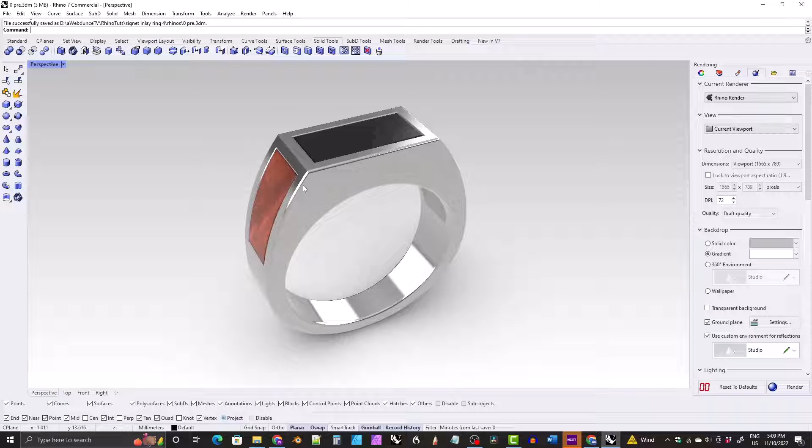I'll show you not only how to make the ring, but also how to make the materials - the silver, the wood, the onyx, and even a kind of rough silver material for the underside of the ring.

We'll start off by creating a new file. I'm going to use the small objects millimeters template.

We'll hop over to the front viewport and lay in the sizing circle. I'm going to make it a US size 10, so I'll give it a diameter of 19.76 millimeters, and set the curve seam to the bottom quad.

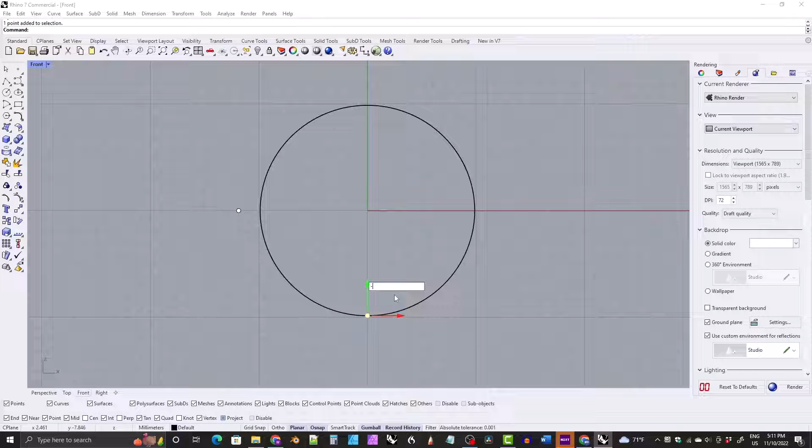Now we'll lay in the bottom arc. I'll snap in a point at the left quad and one at the bottom quad. I'll move the left point out by 2 millimeters, and move the bottom point down - I'll control Z and move it down by 1.7 millimeters.

Now I'm going to lay in an ellipse at the center of the world, snapping first to one point and then to the other. Then I'll mirror this left point over to the other side and split this ellipse by these 2 points, then delete the upper half as well as all of the points.

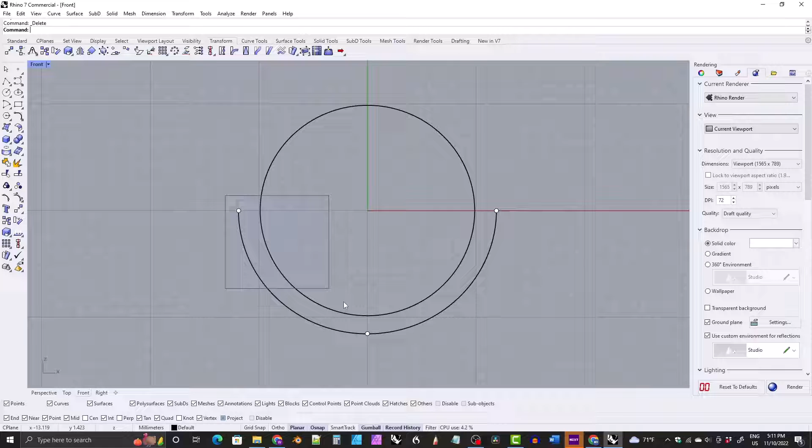Now we want to lay in the top line up here. We'll grab the line tool, snap to the top quad of the sizing circle, and click on both sides up in the command line.

This is going to double the length. I want this line to be 14 millimeters long, but because we've got both sides activated, I'm going to type the number 7 and hit enter. So this is giving us a 14 millimeter line.

I want this to be perfectly horizontal. To do that, I'll hold down Shift, pull out to the side and click. And now we'll raise this line up 4 millimeters.

Now we want to connect the bottom arc to this line up here, and we'll use Extend Curve to do that. Click on Extend Curve, then up in the command line click on Type and set it equal to Arc, then click on the left side of the bottom arc.

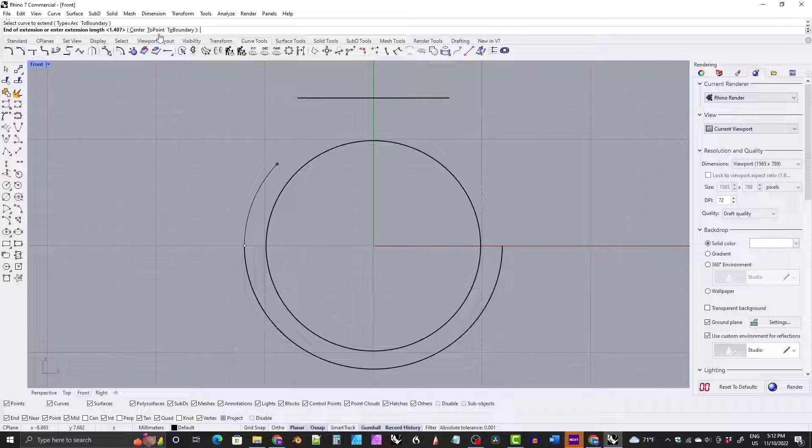You can see the line is extending, but you can't really control where it goes. So up in the command line, click on ToPoint and snap to the left side of that upper line. The command is still running, so click on the right side of the bottom arc, then snap to the right side of the line and click. You'll have to press enter to exit that command.

Then select the bottom and the upper line there, join them together, and move the curve seam down to the bottom.

All right, now we are ready to lay in the side curves. We'll go over to the right viewport and lay in a line at the top - snap to the top and click on both sides again.

I want an 8 millimeter line up here, so I'm going to type the number 4 and hit enter. I want it to be horizontal, so I'll hold down Shift, pull out to the side and click.

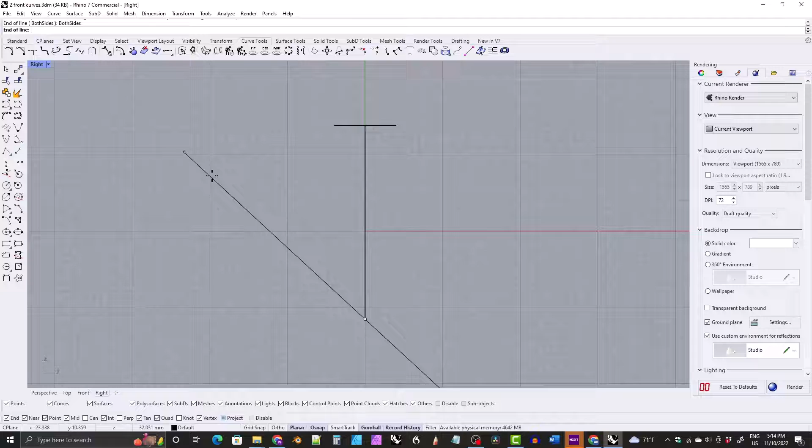We'll do the same thing to the bottom, except the line will only be 4 millimeters long. So we'll get the line tool, snap to the bottom, click on both sides, type the number 2, hit enter, hold down Shift, pull out to the side and click.

Now we're going to use the arc tool. You don't always have to use the arc tool - you can put a variety of shapes between these two lines, but for this project we're going to use it. There's the arc drop down, but we're going to click on this particular arc tool right here, under curve tools. If you can't find it there, you can get it from the arc drop down - it's the third option in.

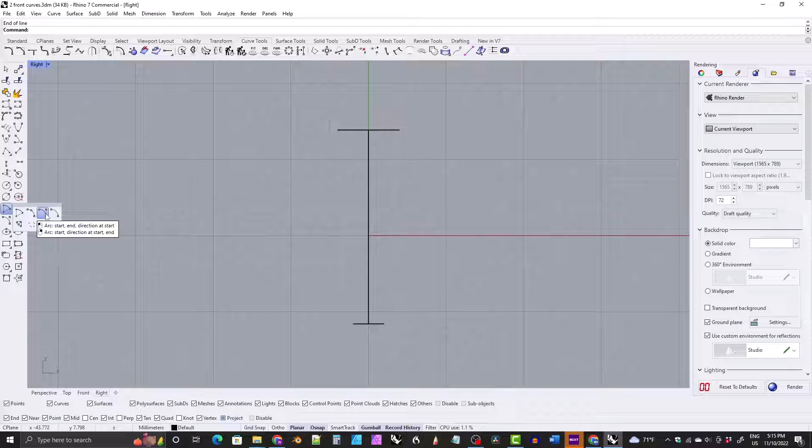This particular arc tool lets us select a start point, an end point, and a direction. The direction we want to choose is straight down. To do that, hold down Shift and pull down and click, and this will make that gentle arc for you there. Then we want to extend it a little bit above the top and a little bit below the bottom.

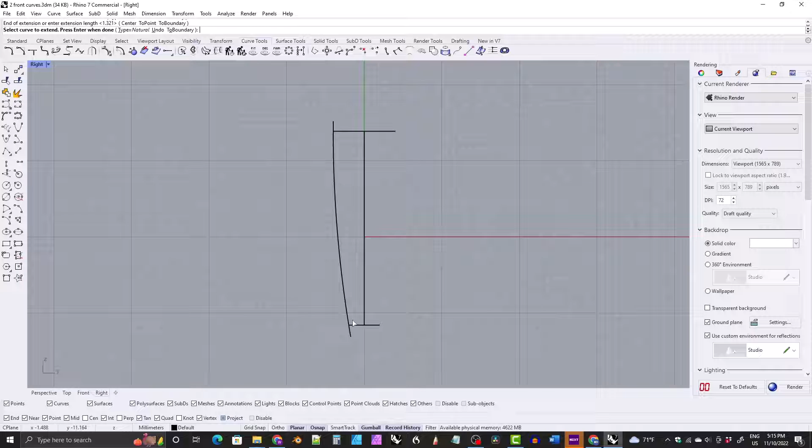So we'll click on Extend Curve, click on the top and pull up a little bit, click on the bottom and pull down a little bit. Hit enter.

Then we'll mirror this line across to the other side. Now we'll join these two lines together with straight lines, getting the line tool again and connecting the two tops and then the two bottoms. Then we'll join all of these lines together to make a closed shape, and delete these guidelines that we made earlier.

So now we've got our front curves and our side curves done, and we're ready to create the base shape. We'll just select the two front curves and extrude them out. I'm going to switch to shaded mode so it'll be easier to look at, and then we'll click on the side curves and extrude them out.

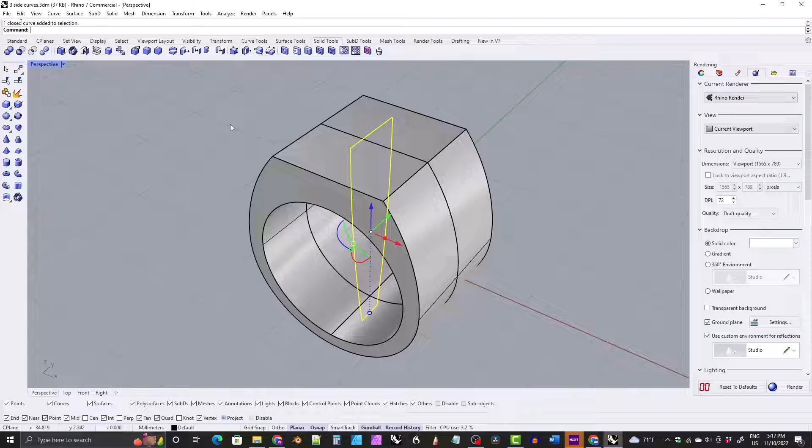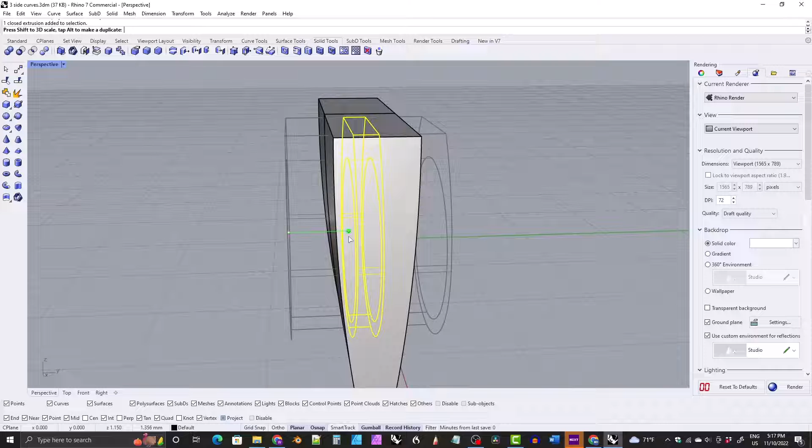You want to make sure that the two shapes extend past each other. For instance, you don't want this shape to come within this shape here like that. You want it to extend past the front shape, and you want the front shape to extend past the side shape. You don't want something like that - you want the shapes to extend past each other.

Now we're going to run the Boolean intersection command. Click on one of the shapes, it doesn't matter which one. Click on Boolean intersection, click on the other shape and hit enter. And that is our base shape.

Now we're ready to hollow out the ring. We're going to have to create a lot like creating the ring - a set of front curves and then a set of side curves to create a shape that will hollow out the ring. So let's jump over to the front view.

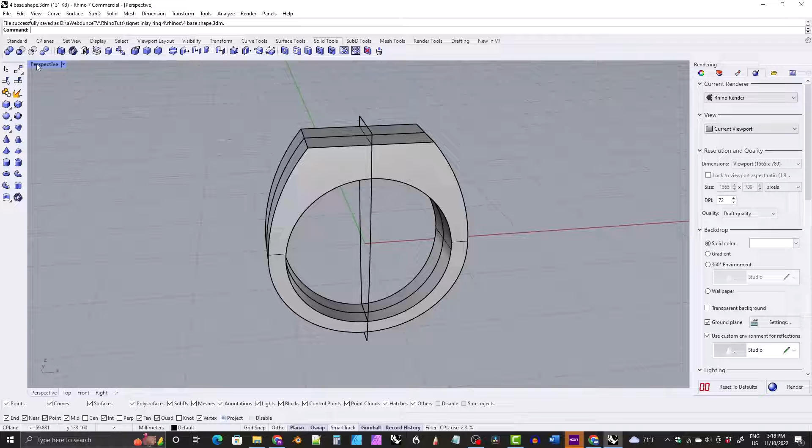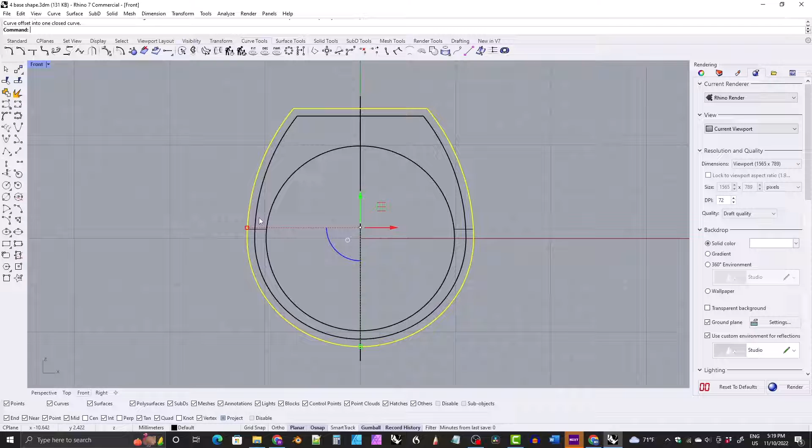It's better to be in shaded mode for this. We're going to click on the outer curve here. Normally, if we didn't have the inlaid gemstones, what I would do is offset that outer curve by maybe 0.8, maybe 1, maybe 0.8 to maybe 1 millimeter, and this shape here would be the beginning of the shape of the hollow from the front view. But because we have those inlaid stones, we can't do that.

Let me see if I can show you why. Let's say that the inlaid gemstones are 0.6 millimeters thick, so we'll offset the outer curve by 0.6 millimeters. Let's pretend that this was a gemstone here. If we were to hollow this ring out by coming in 0.8 millimeters from the outer curve, that would only leave 0.2 of a millimeter of metal behind the gemstones for them to rest on.

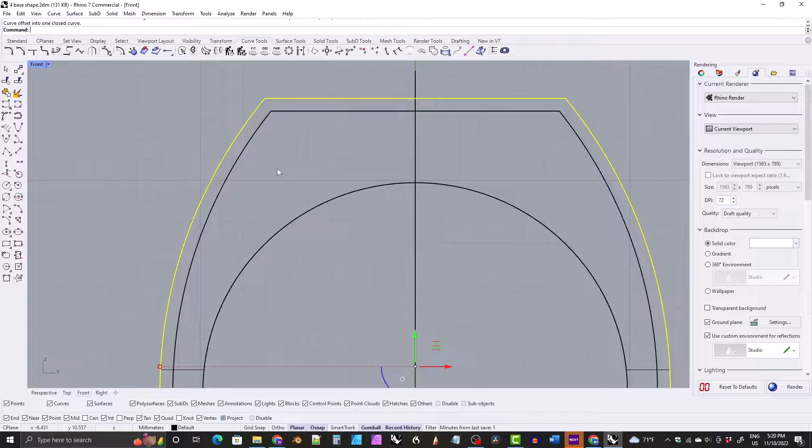And that's just not enough metal. So what we need to do - I'll just delete both of these - is first, again this is just because of the inlaid gemstones, we will select the outer curve and offset by the thickness of the gemstones. We're going to say that they're 0.6 millimeters thick for this project. So this is where our inlaid gemstones will come to.

And now we need to click on that line and offset again by the amount of metal that we would like to have behind our gemstones. I'm going to say 0.8 would be good for that. So we can delete this line now, and this is the starting point of our hollow shape from the front view.

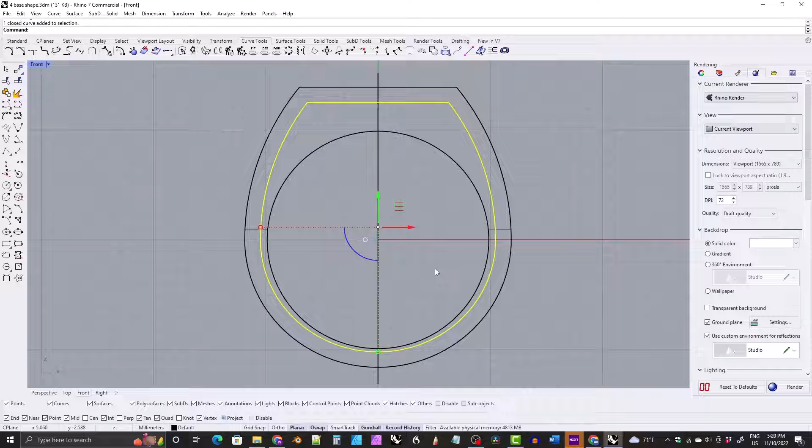Now we're going to cut the bottom off this shape. So lay in a line somewhere around here, probably about 3 or 4 millimeters down from the red axis line, somewhere in this area right here. Then select both of those lines, the shape here and this line that we just made.

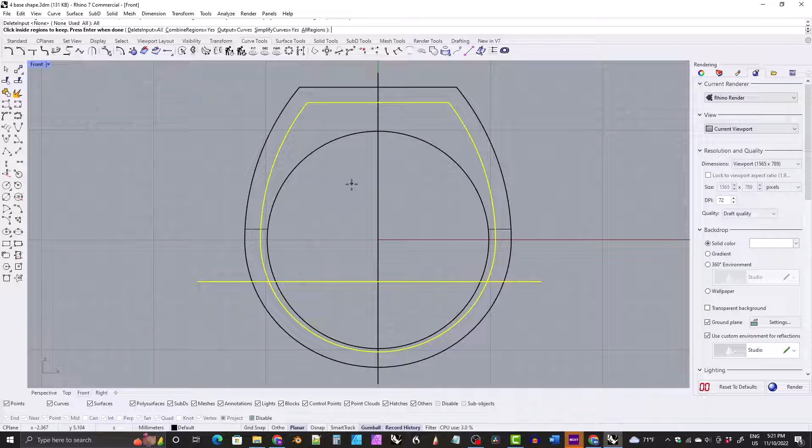Come up to Curve Tools, then Curve Boolean, click on that. Make sure that Delete Input is set to all - if it's set to none, for instance, click on it and set it to all. Then click inside this area here, you'll see it kind of highlight, and then hit Enter. You'll be left over with this shape.

Now, we don't want our hollow to come down and then come out abruptly out of the ring. We want it to exit gently. Whenever possible, it's not always possible, but we would generally like the hollow to come out a little above the halfway point, but that's not a hard and fast rule - that's just, at least where I worked, a general preference whenever possible.

That might not apply to every situation, since I just worked at one jewelry store for 10 years. So that was a general rule of thumb there, though it might not apply everywhere. But in this case, we do want it to exit about 1 millimeter above this line here.

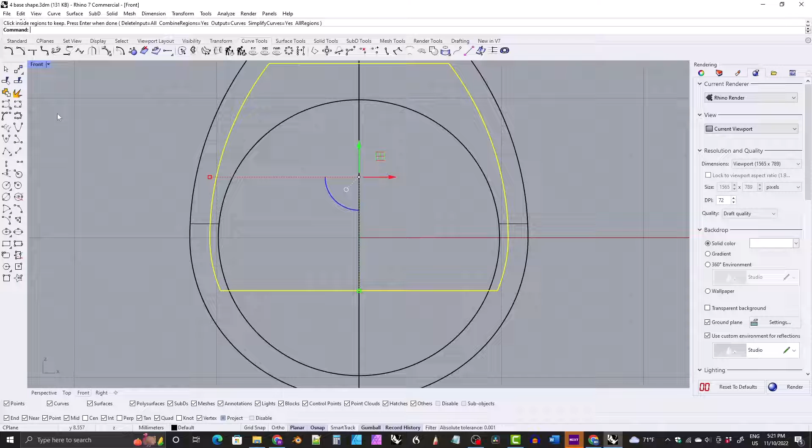So we'll lay in a straight line as a guide going across the center here, and then lift it up about 1 millimeter above—this is where our hollow is going to exit. Our gemstone is going to end about 2 millimeters above that line, so this is going to be about the bottom of our gemstone here.

Okay, so we'll delete that line for the moment, and we're going to select this line—this is just a guide, by the way—and we're going to select this shape here.

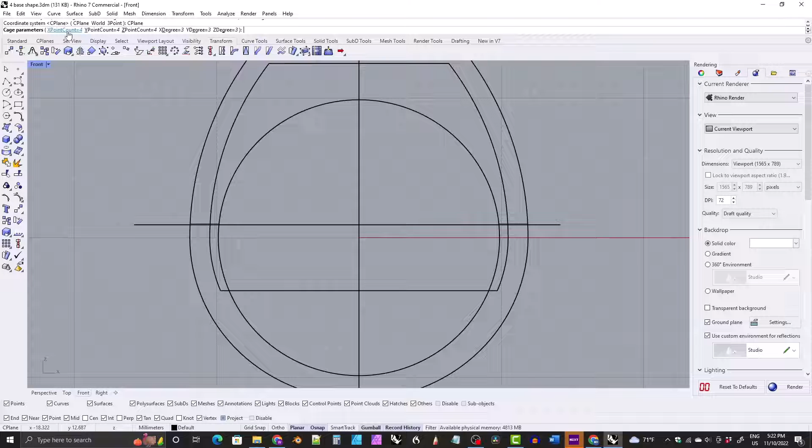We're going to go to Transform and click on the Cage Edit tool, and we're going to click on Bounding Box, C-Plane, and then it should say 444 333 by default. You should be able to just hit Enter through this part, but if it doesn't, double check it says 444 333, then hit Enter once, twice, and you'll get these control points.

Just box select the bottom row of control points and scale them in until your shape intersects over where this line intersects the sizing circle. You don't have to be 100% precise, just close. So that's pretty close right there—this shape is going over where this line intersects the sizing circle.

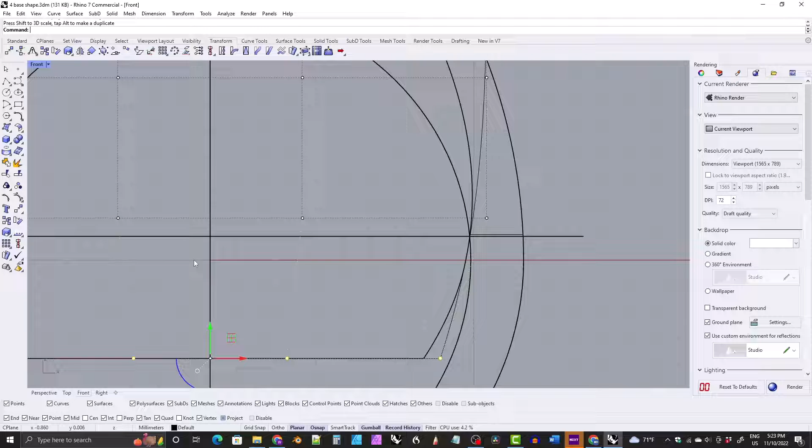So we know that the hollow is exiting the ring at about 1 millimeter above this axis line here. Okay, we're going to delete the cage, and we can delete this guideline here as well.

And now we will create the shape of the hollow from the side view. We'll hop over to the right viewport and select this outer shape here. And again, this is just a design choice, but I'm going to inset or offset that curve by 1.2 millimeters. So now this is the shape of our hollow from the side view.

We'll hop over to the perspective view. Let's turn on—well, we don't even need to do that. So we've got this curve here, that's our side view curve, and this is our front view curve for the hollow. And now we will isolate those.

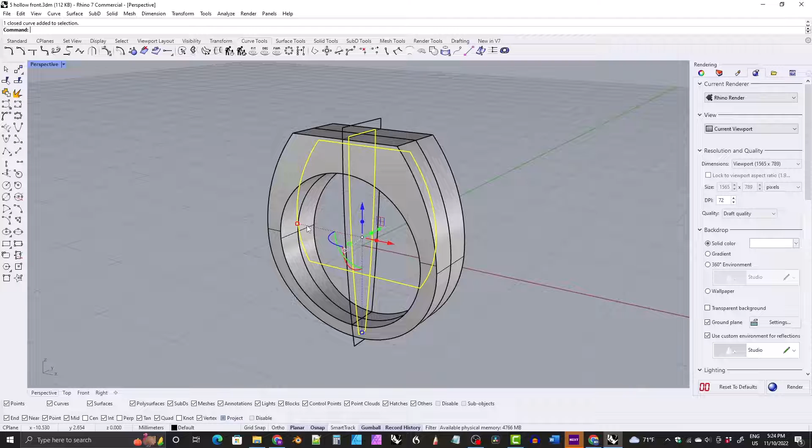And we will extrude the front view curve, and we'll extrude the side view curve and take the intersection of those two shapes, just like we did with the ring. And now we'll type show and bring back the ring.

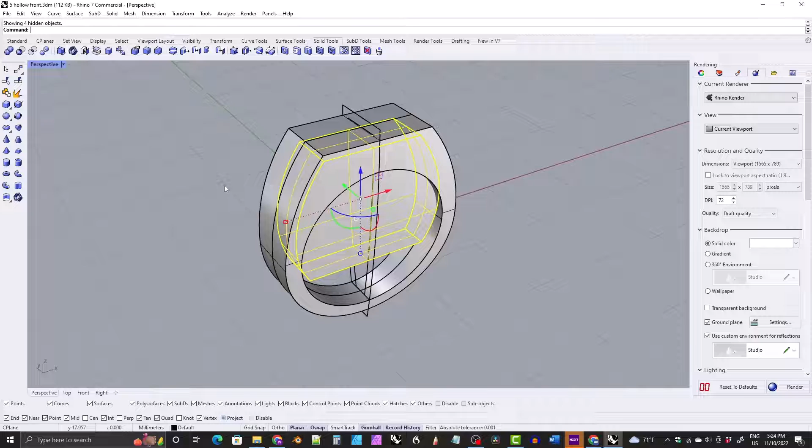And this shape here is going to cut out the hollow of our ring. So you click on the ring, click on Boolean difference. Now, if you want to keep this shape, this cutter that's going to cut out the hollow, you want delete input set to no. If you want the shape to be deleted after you cut out the hollow, you set delete input to yes. Okay, for this project, I'll just go ahead and set delete input to yes for this particular operation.

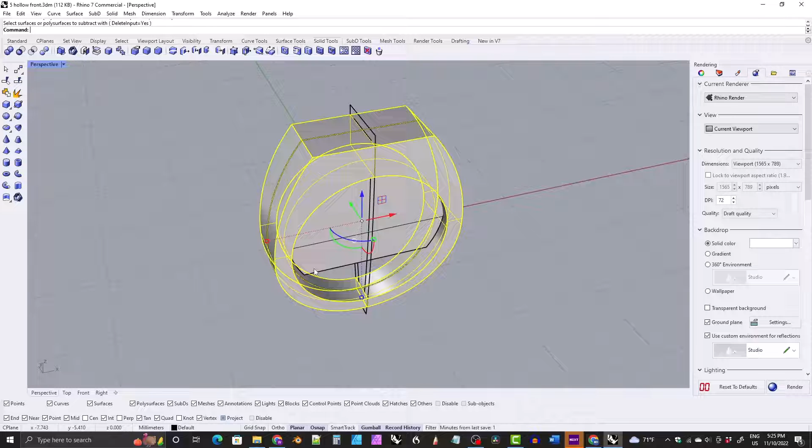So I'll hit enter, and I think I missed a step here some kind of way, so we'll try that again. Click on the ring, click on Boolean difference, delete input is set to yes. I didn't click on the other shape, so you got to click on the other shape and then hit enter, and it will create the hollow, and it also deleted the cutter for us.

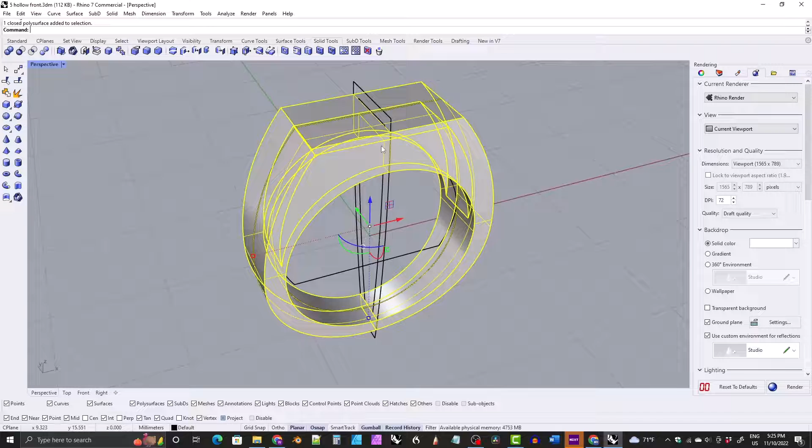Okay, and now what we want to do is fillet the entire ring. So you can set individual fillets—you can definitely do that. For instance, you could put a 1 millimeter fillet on these... try that again... a 1 millimeter fillet on these two shapes, edges, and then you could put a 0.5 millimeter fillet on these edges here. I'm clicking chain edges so it selects all the way around.

Okay, you could definitely do something like that, and I did do that in my short version, my short video that I made for a ring like this. But I've decided to go with sharper fillets on the entire ring, so I'm going to click on it, and we're going to give 0.3 millimeter fillets to the entire ring. So I'm just going to box select the entire ring, hit enter a couple of times, and now the entire ring has 0.3 millimeter fillets.

I'm going to check the edges. Sometimes the fillet command will leave you with bad edges when you do an entire ring like that.

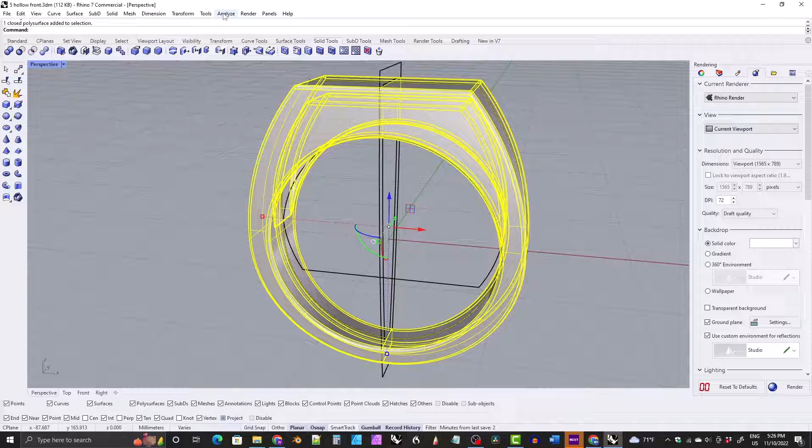So I'm going to select the ring, click on Analyze, and click on Edge Tools and Show Edges. And what we're looking for here is up in the command line that there are no naked edges, and no non-manifold edges too, but I was particularly looking for no naked edges in this case. Okay, so we're good on that. There were no problems. At least it appears there were no problems.

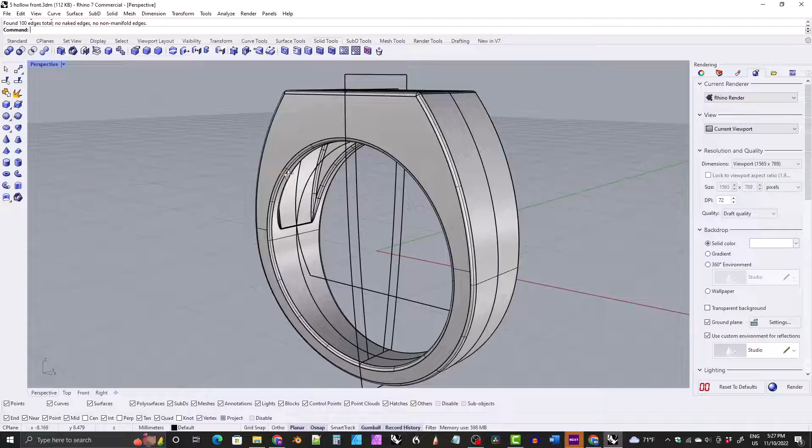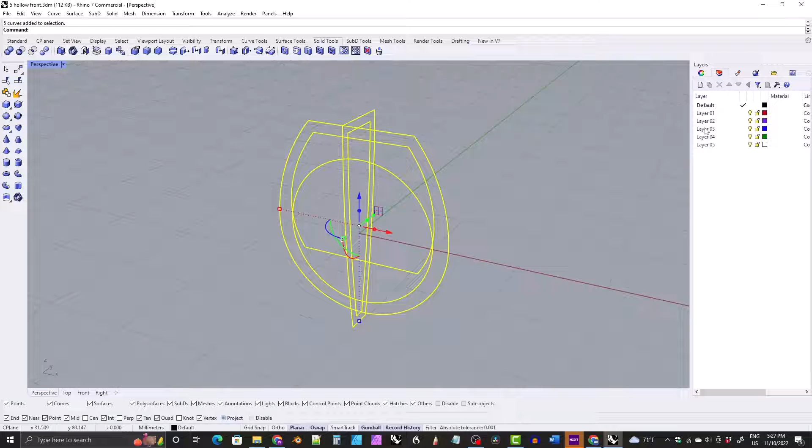So we've got the ring hollowed out, we've got it filleted, and we're ready to move on to making the recessed areas here. But first, these curves are kind of getting confusing to me, so I'm going to move them all to a separate layer. So I'm going to select all the curves. I hid the ring, now I'm selecting all the curves, and I think I'll move them to the blue layer, and that way we can turn them off and on as we need to.

I'll call the blue layer curves. All right. And then I'll turn them off. I'm going to type show to bring back the ring. And now we can move on to creating the recessed areas. So what we want to do is create copies of the top panel and the side panel.

To do that, we're going to come to Solid Tools and then click on Extract Surface, and make sure that you set copy to yes in the command line. So if it says no, click on it and change it to where it says copy equals yes. Then click on the top panel and the side panel and hit enter. And now we have copies of those two panels. We want to isolate those, so click on Visibility and then Isolate Objects.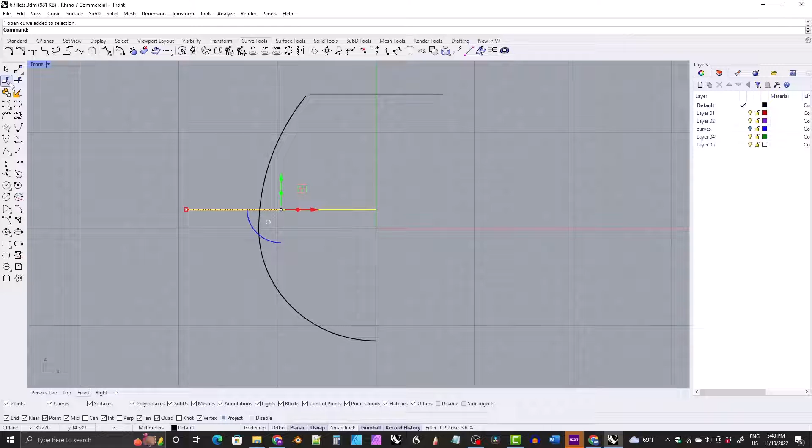And now we will jump over to the front viewport. We're going to lay in a straight line coming in from the center of the world. Hold down Shift and pull out to the left, and we'll raise this line up 2 millimeters. And we're going to use this to cut that surface off. So while that line is selected, click on Trim, and then click on this bottom part of this surface, hit Enter, and then hit Delete.

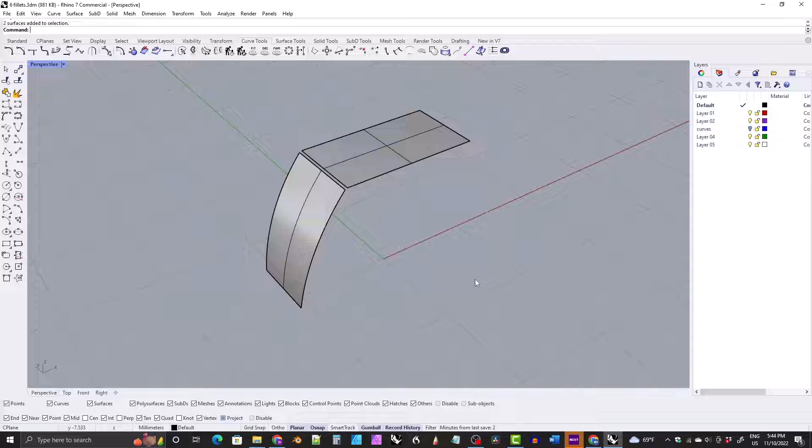And we'll jump back over to the perspective view, and we'll use these surfaces to create the cutters that will make the recessed areas. So select both of these panels, and just to give you a word about selecting, if you select from left to right, you have to put all of the objects you want within the box, because it will only select anything that is fully within the box. If you select right to left, whatever touches the box gets selected. Okay, so you can either do this, or you can do this, or you can hit Control A.

Either way. So select both of those surfaces, come to Curve Tools, and click on this little drop down and choose Duplicate Border. And it has now placed curves around the edges of these surfaces. So now we want to select this curve on the top surface. And because the top surface is flat, we have our choice. We can use either the regular Offset Curve command, or we can use the Offset Curve on Surface command. But because this one is simpler, we'll go ahead and use it. So we'll click on that.

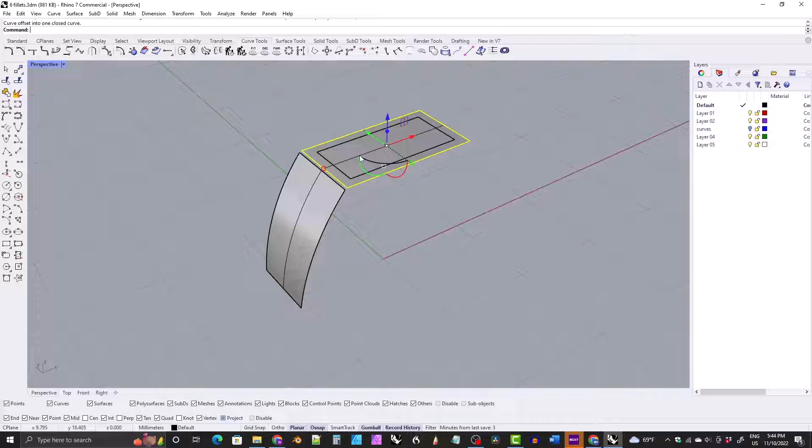We want a distance of 1 millimeter, and then you want to pull inward toward the center of your surface and click. Okay, and now we will select this curve and go to Offset Curve on Surface. So because this is a curved surface, you have to use Offset Curve on Surface. It says Select Base Surface, so click on the surface. Make sure your arrows are pointing inward. They should be, but if for some reason they're not, click on Flip up in the command line until the arrows are pointing inward toward the center of the surface.

We want the offset distance to be 1, so if it already says 1 there, you can just hit Enter, but if it doesn't, you would need to type 1 and then hit Enter. Okay, so now select both of these surfaces, and let's run the Split command, and then click on these two curves and hit Enter. And now I want to select everything, so I'm going to press Control A to select everything, and then I'm going to deselect these two surfaces. To do that, I'm going to hold down Control and then click on this surface and then this one. And now I'll press the Delete key to delete everything else.

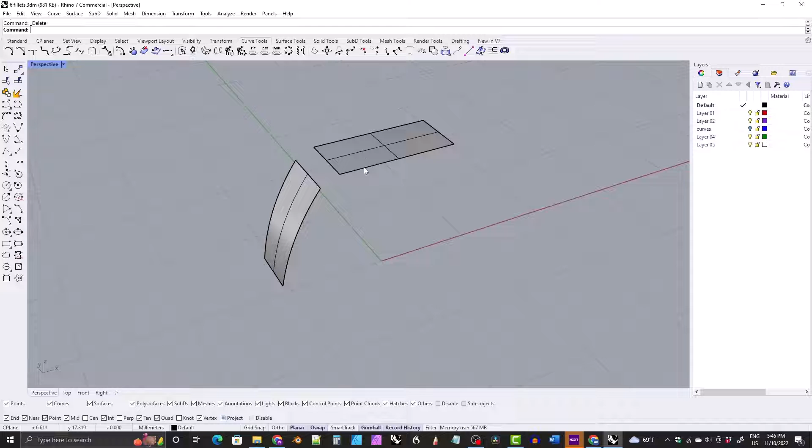So we're left with these two surfaces, and these are what we will use to create the cutters. So select both of those surfaces, click on Surface Tools, click on Offset Surface, set the distance to the thickness of the gemstones, which is 0.6 millimeters.

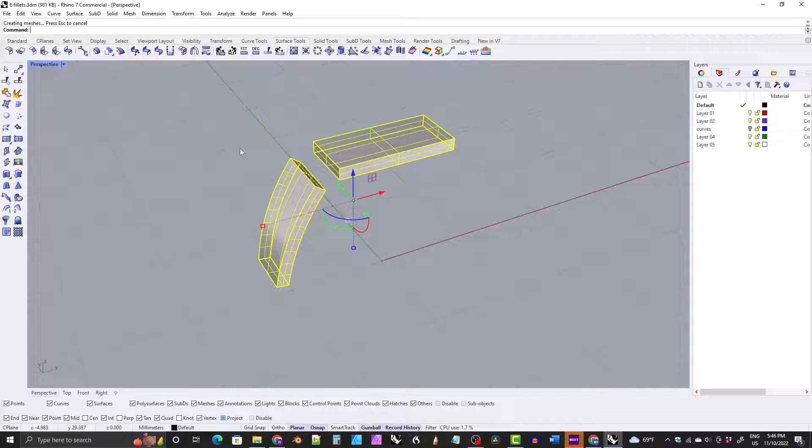And then make sure that you have solid set to yes, both sides set to yes, and delete input set to yes, and then hit Enter, and you will end up with these shapes here. We will mirror this one over to the other side, and then I'll type Show to bring back the ring.

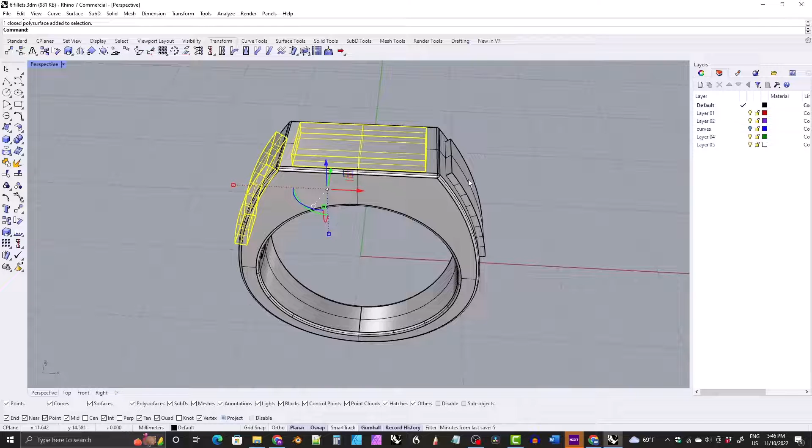Now these are going to be not only the cutters to cut out the recessed areas from the ring, but we're going to make the gems out of these shapes as well. I'm going to put them on a different layer, so I'm going to select all 3 of them, and I'll put them on the green layer. So I'm going to right click on the green layer and click on Change Object Layer.

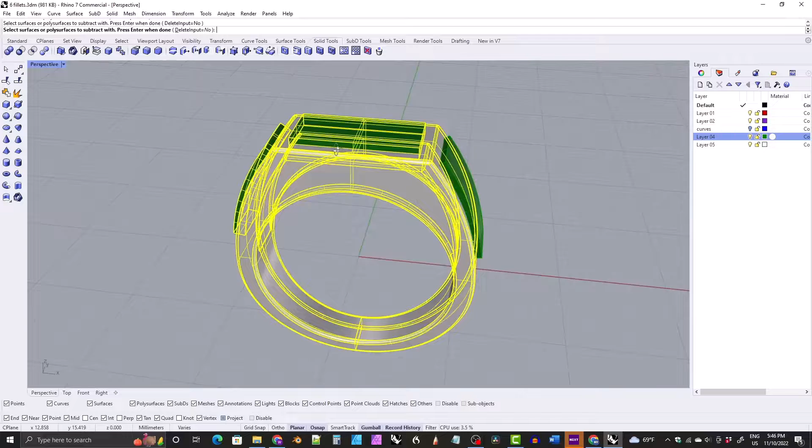And now we will click on the ring, and we will run the Boolean difference command. Make sure that delete input is set to no. So if it says yes there, click on it and set it to no, because we want to keep these shapes that we just made. Hit Enter. And now if we turn off the green layer, you can see that we have our recessed areas.

All right. While we have got the green layer turned off, I'm going to go ahead and put some small fillets of 0.1 millimeters on these edges here. So 0.1 millimeter radiuses on all of these edges. Okay, this is just for the render. So the little fillets, they will catch the light, and it just helps out with the render. So I'm going to hit Enter a couple times.

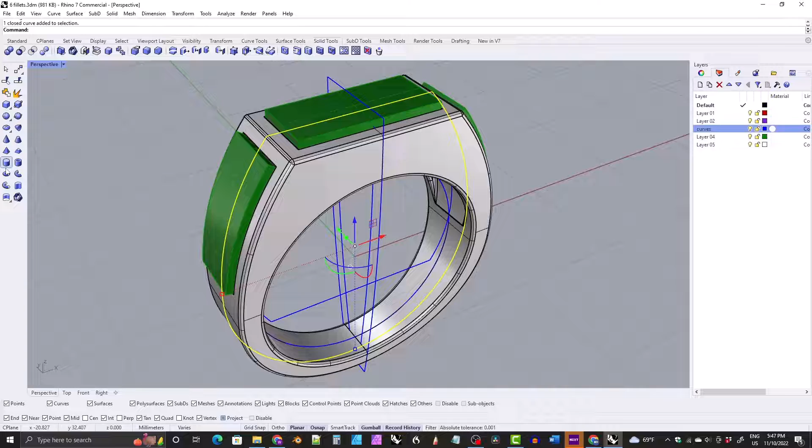And now I'll bring back the gemstones, or these shapes here, and we're going to trim them so that they are level with the ring. To do that, we'll bring back our curves. We'll select this outer curve right here, and we'll extrude it out. Okay, and now select the 3 gemstones, and then click on the Boolean intersection command, and then click on this shape here. Hit Enter, and now these are our gemstones. They're level with the ring.

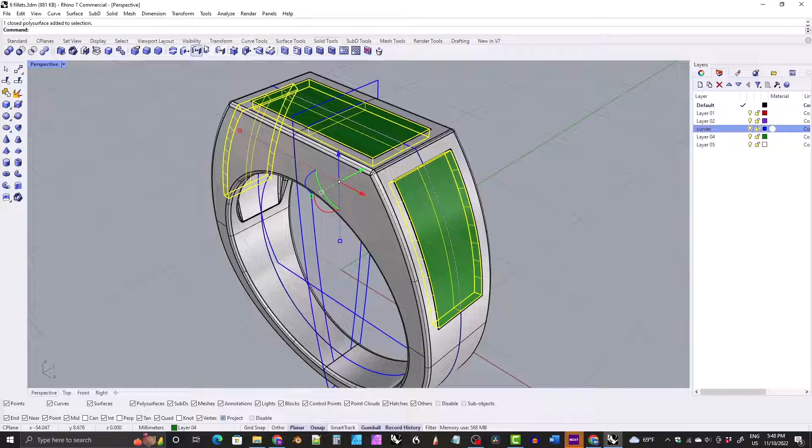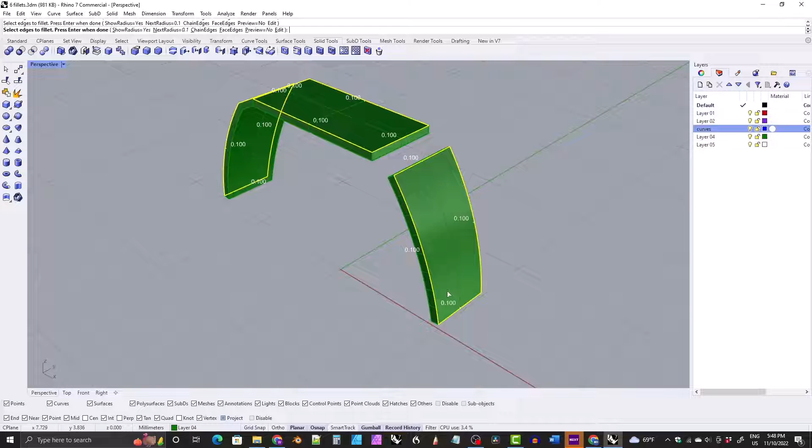I want to isolate them for just a moment and just put a small fillet on their outer edges as well, again of 0.1 millimeter. 0.1 millimeter is going to be our radius, which it should already say that for you. And we'll just click on these edges right here. And hit enter a couple of times. And again, this is just for the render. And so we've added those fillets.

I'm going to type show to bring everything back. I'm going to turn off the curves. And we are almost done. All that's left is to make the punch outs back here. And so that's what we'll do right now. Creating the punch outs will be very similar to creating the recessed areas. We want to start off by creating copies of this panel and this panel.

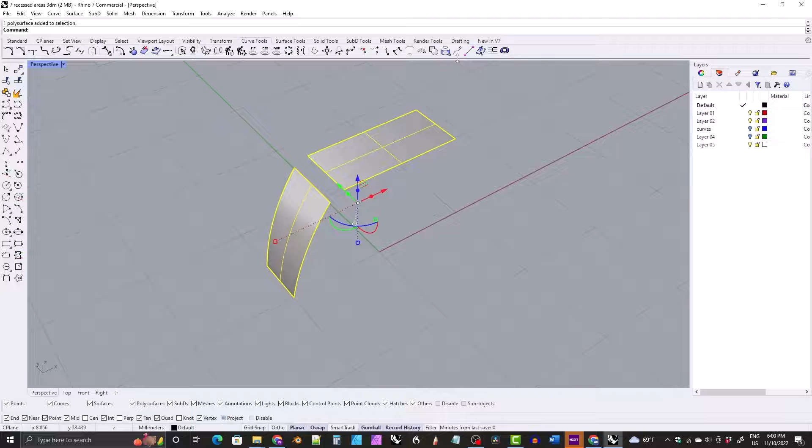So we'll come up to Solid Tools, Extract Surface, make sure the copy is set to yes, click on the top panel and this side panel here on the left, hit enter, and then come up to Visibility and Isolate. All right, and now we will come to Curve Tools and Duplicate Border. We will select the border of the top surface here and run the offset curve on surface command. We want to set the distance this time to 0.8 and then pull inward toward the center of the surface and click.

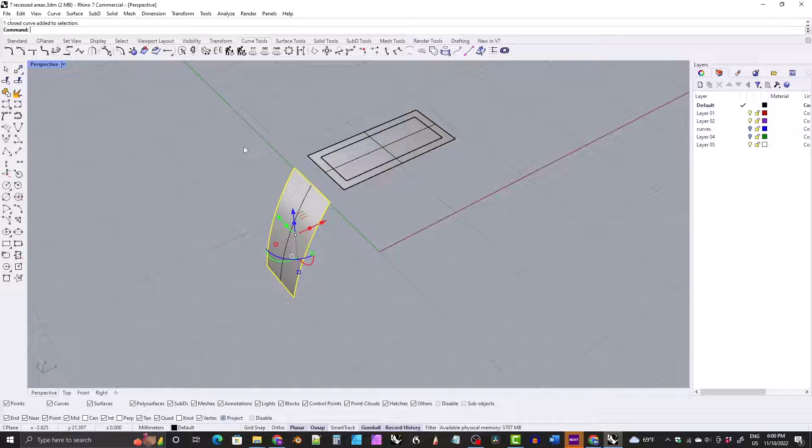Then select the other curve and click on offset curve on surface, click on the surface, and we want to set the offset distance to 0.8, so type in 0.8, hit enter. And now select both surfaces, run the split command, and click on these two curves that we just made. And now select everything and deselect using control click. So again, select everything, hold down control and click and hit delete.

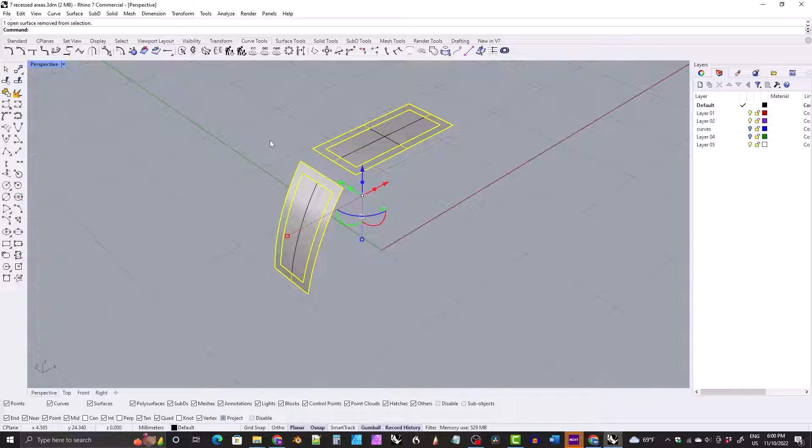All right. And now we will take these two surfaces and we will do offset surface on that, set the distance to 2, and make sure that solid is yes, both sides is yes, and delete input is yes. Hit enter. And now we want to put a small fillet, give a radius of 0.15 to these corners here.

Hit enter a couple of times, and then we'll mirror this shape over to the other side and type show to bring back the ring. Okay, now we will use these shapes to cut out the punch out holes, and we'll do that with Boolean difference. So we'll click on the ring and then we will click on Solid Tools and Boolean difference.

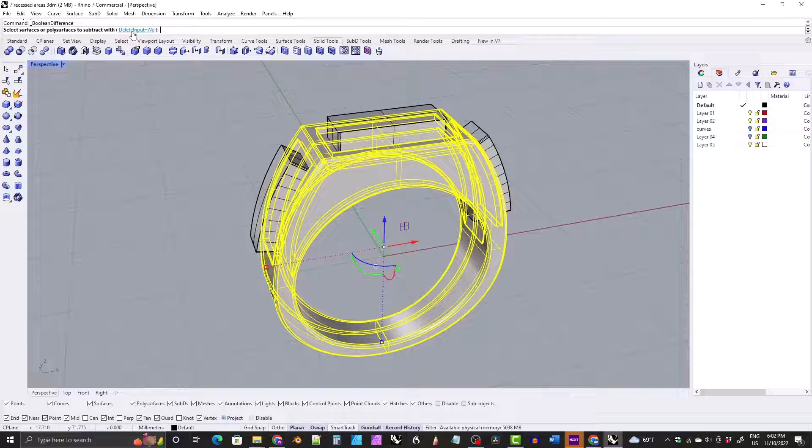Now again, here we have a choice. Do we want to keep the cutters or do we want them to be deleted? So that's your choice. If you want to keep the cutters, you would set it to delete input equals no, and then you would click on these shapes and hit enter, and then the shapes would stay. And then if I was going to keep them, I'd probably make a layer called cutters,

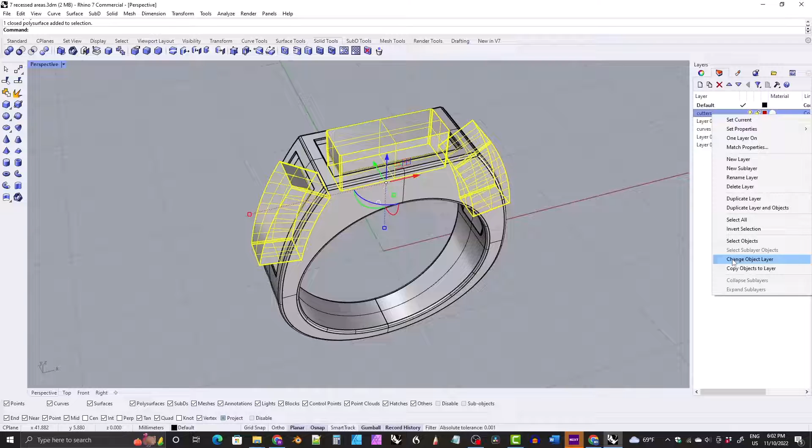and then I would move them over to that layer. Okay, so then they're on a layer that you can turn off and on, and if you ever want those cutters again, you can just turn it on and there you go. You don't have to make them again. Okay, so now alternately you could do all of this, and so I don't know if we undone the, yeah, okay.

And yes, that's a phone ringing in the background. I don't know if it's coming through into the recording or not, but if it is, I apologize.

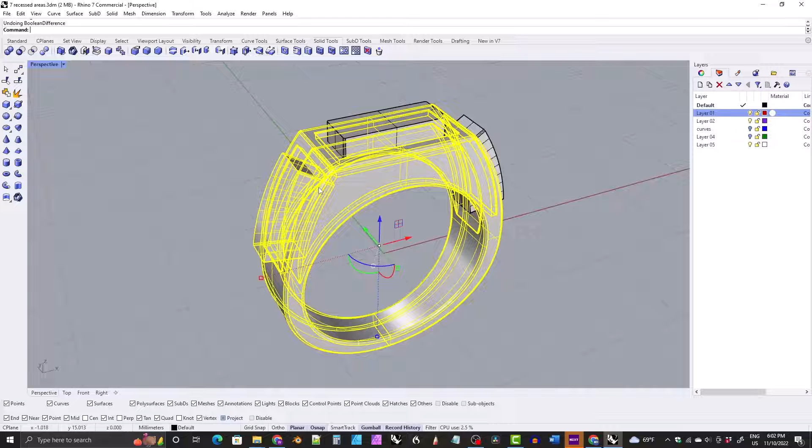All right, so you could run this and set delete input to yes, click on these three shapes, hit enter, and then they would disappear after the operation was done. So either way that you want to do it, that's up to you. If you want to keep the shapes, you can keep them. If you want to get rid of them at the end of the operation, you can do that as well.

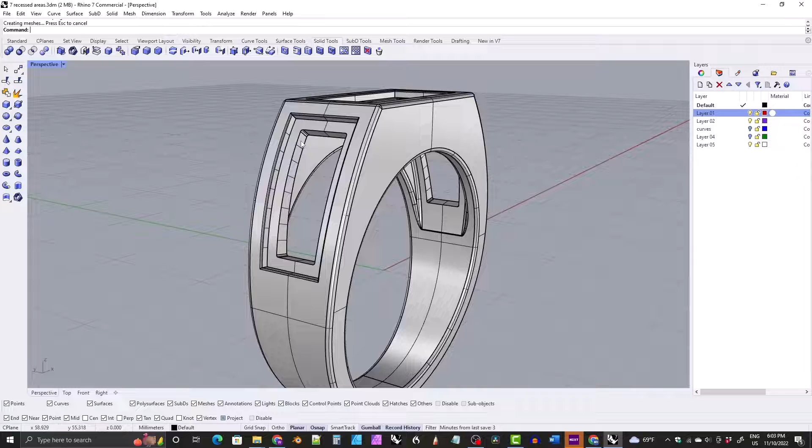Now I want to put a small fillet along these edges, and so we'll click on the fillet command. I'm going to make the radius be 0.1, and this is why I rounded the corners of those cutters for the punch outs, so that we could use the chain edges option here. So click on chain edges and click on an edge, and because we rounded those corners, it selected all the way around for us.

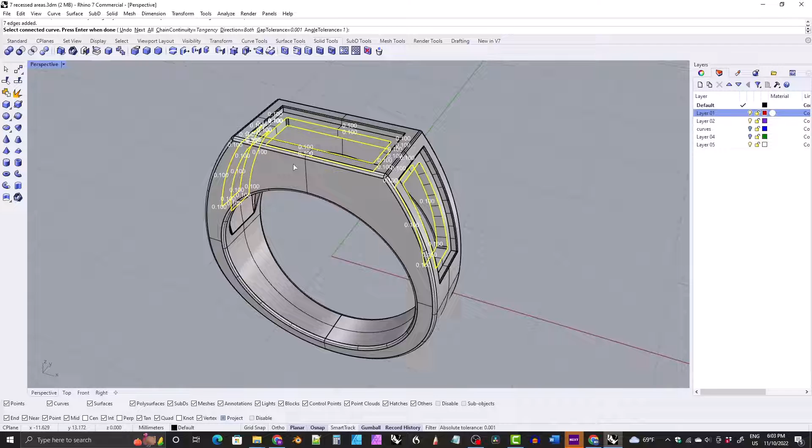And then the way you do this, because I want to do this for all three punch outs, hit enter, chain edges again, and then click on the lower edge down there, enter, chain edges, click, enter, and so on, and then hit enter 3 times. And now we are done with our punch outs. I'll bring back the gemstones, and actually we're just done with the modeling. So now we're ready to move on to

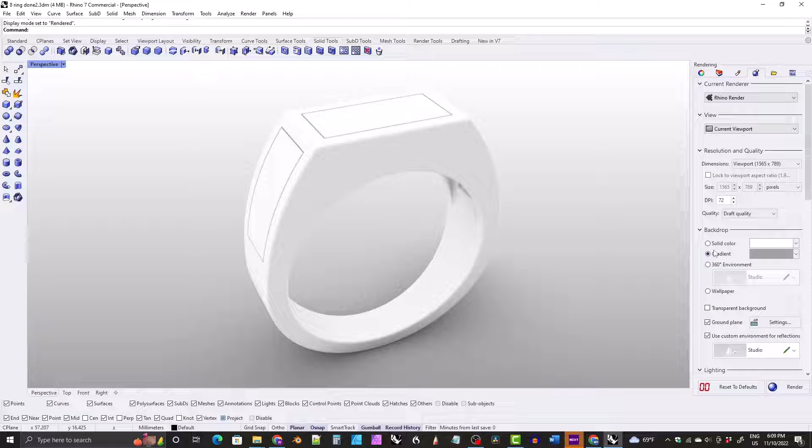creating the materials. So let's go ahead and switch over to rendered mode, and let's change the background first. So click on the rendering tab and then come down here to backdrop and click on gradient. Click on this color box here, and if you're not on the custom color list, like if you're on one of the color wheels, just click on custom color list, and let's change the top color to the light gray, and let's change the bottom color to white.

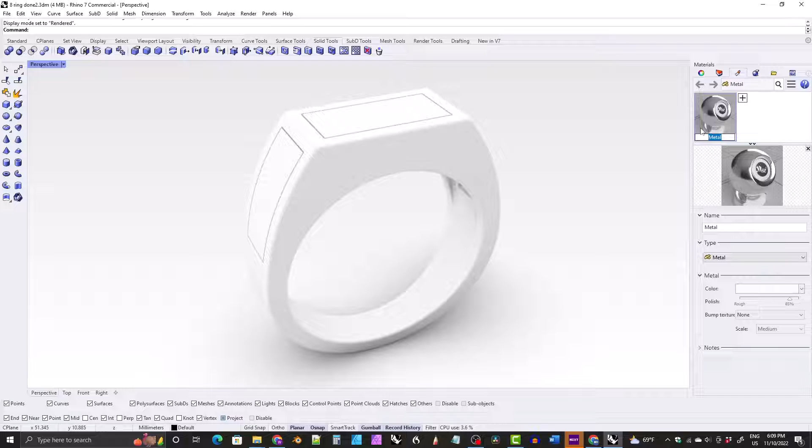And now let's switch over to the materials tab and click on this plus sign and then click on metal, and by default it makes a kind of silvery material for you. It also highlights the name, giving you a chance to rename it. I'm going to type in silver. You can call it whatever you want. If you don't rename it there, it's okay. You can rename it later here at any time that you want.

And now let's drag this over onto our ring, and you can see that's already looking pretty nice. But let's just click on this color box right here, and if you're not on the custom color list, just click on this drop down and switch to custom color list. While you're editing a metallic material, Rhino will present you with metallic colors and only metallic colors. So let's click on silver and click OK. It's just a little bit darker is all.

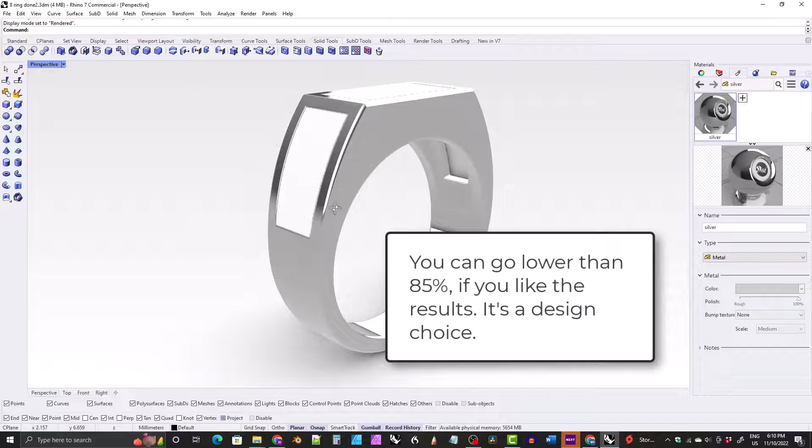Okay, and you can change the polish level as well. So it's a slider. You could drag it around to whatever you like. For polished metal, you probably want to leave it at 85% or above. You could go all the way up to 100. In my opinion, 100 looks a little too harsh, so I'm going to put it at 90. So you can either drag it around or you can double click it to type in a value. So I'm going to double click it and type in 90%.

Okay, and now let's go ahead and make the onyx material. So we'll click on this plus sign here, and you can either use paint or plastic. In my personal opinion, paint looks a little better for onyx, but you can experiment with plastic too. And let's change the name to onyx, and then click on the color block here and change the color to black.

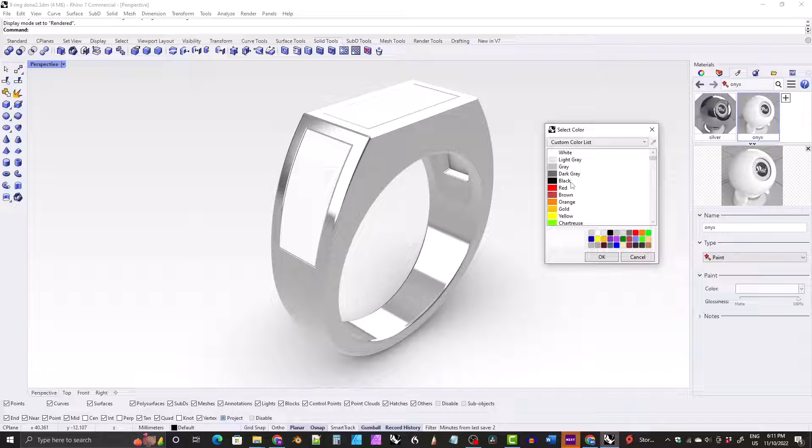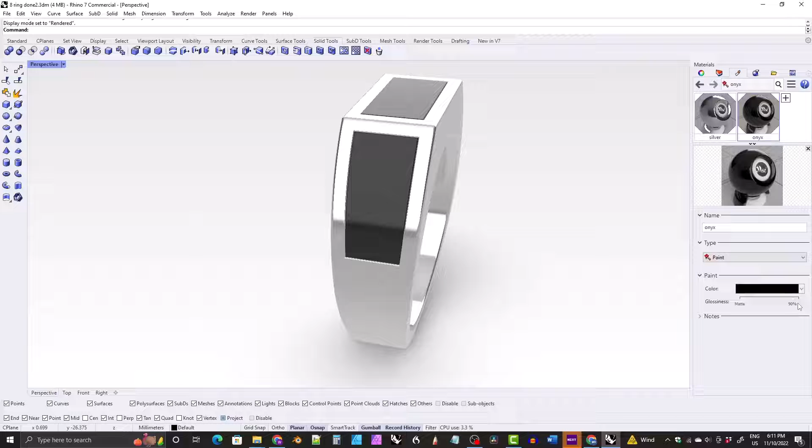And if we drag that on, let's drag it on to all of our gemstones, even though later we're going to make the wooden material for the sides. If you look, you can see that the shininess is a lot sharper compared to the shininess of the metal. We just double click on the slider here and change it to 90, the glossiness slider, and then it will match the shininess level of the metal a little better for us. And in my opinion, onyx and silver is a great combination. I think that looks really sharp.

Okay, now we'll make the wood material. Before you create the wood material, you'll need to download the image, and you'll do that over at textures.com. You can also take a picture of wood, it's up to you. You can use any image that you want, honestly. But this is the image that I used. And textures.com is, in my opinion, a really great website. I've got a free account there, and I've used it for years. You can sign up for a paid account if you wish, but you don't have to. A free account will suffice for this project.

Click on wood, and then click on find wood. So over on the left panel, you'll have to use their scroll bar, scroll all the way down and click on wood, and then click on find wood over here, and then scroll down a pretty good bit until you find this image right here, and click on that, and it's called WoodFine0011. Download that to your computer and try to remember where you downloaded it to. And then once you have that image downloaded, then we can create the wood material.

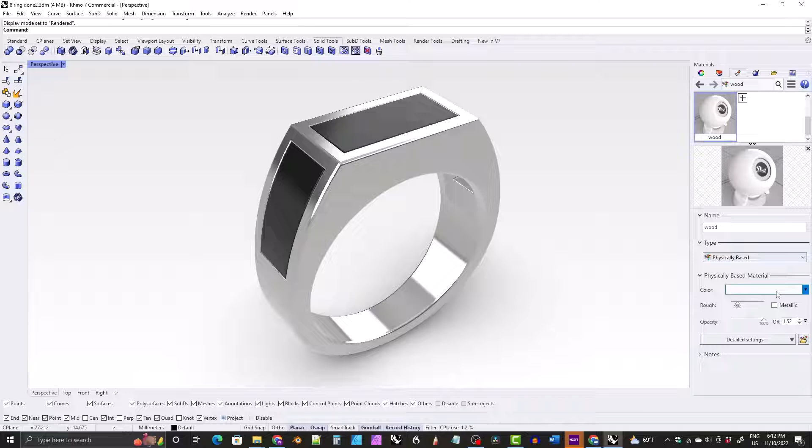So click on this plus sign and then click on physically based and change the name to wood or whatever you like. And then here on the color block, click on this little drop down and click on assign texture. Navigate to wherever you saved that wooden image. For me, it's right here. And now it's already a material. You can go ahead and drag it onto your gemstones there on the side.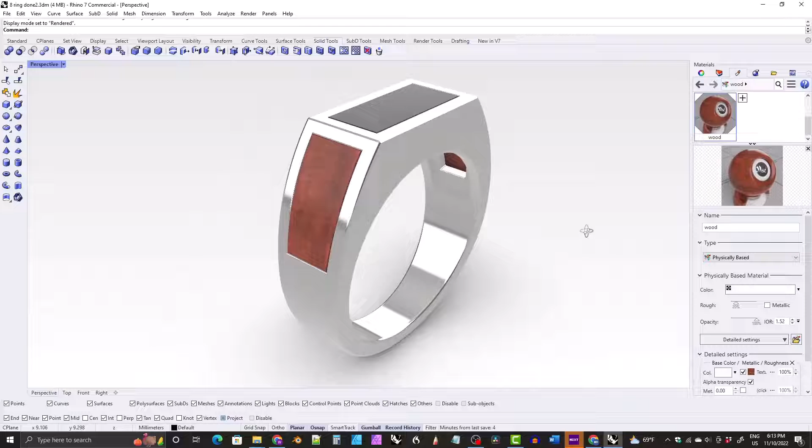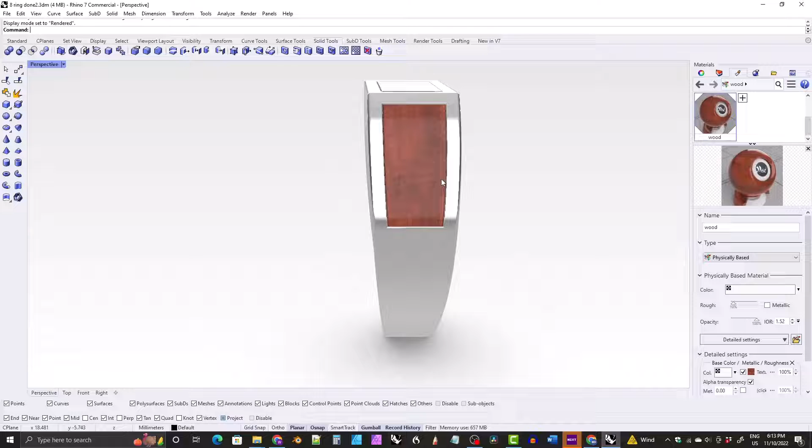Okay, and the shine is a little bit dull, so for some reason physically based materials have a roughness level instead of a glossy level or polish level. So to match a 90% polish level, we'll need to set the roughness level to 10%. So double click on that and type in 10, and you can see that's increased the shininess a little bit for us. It matches our ring better. So now I'm going to show you how to change the direction of the wood grain if you want to do that.

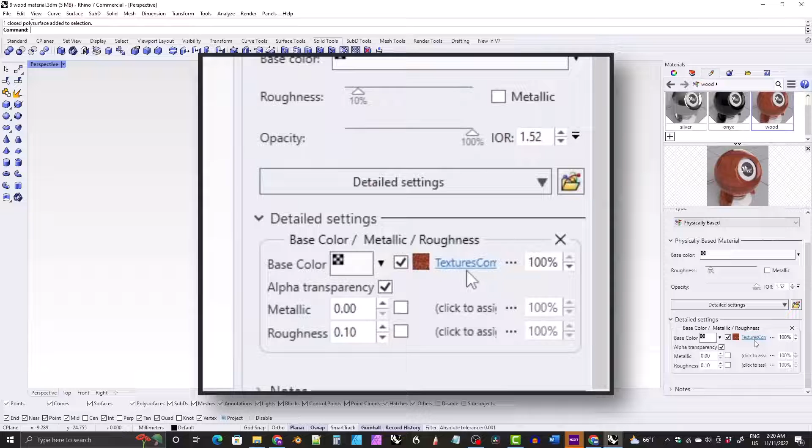If you want to change the angle of the wood grain, just come down here to this panel called Detailed Settings. You can see what looks like the word text here. Depending on how wide your panel is on the side, that actually is the name of the image. So just click on the name of the image. Don't click on the three dots. Click on the name of the image, and it will pull up some other settings.

Scroll down, and one of those settings is rotation, and you can type in different angles there. So for instance, you could type in 30 degrees, which looks pretty good. And that will actually apply to anything that has that texture. Okay, so that's one way that you can rotate the textures. And now we'll work on creating the rough unfinished silver material on the underside of the ring.

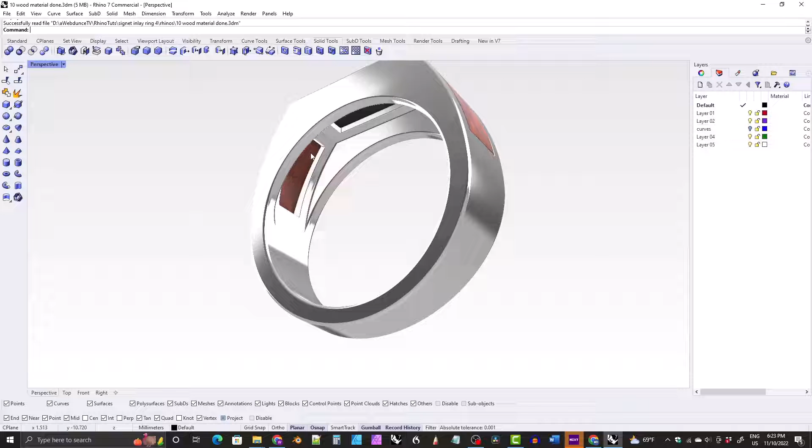Okay, to give the inside of the ring a different material, we'll need to split this ring into two pieces, the outside and the inside. So let's switch over to shaded mode. And let's turn off the green layer, which, by the way, I meant to call Gems. I meant to rename it. I'll do that now. And let's turn that off. And then under Solid Tools, let's grab the Extract Surface command. And make sure that you have copy set to no in this case, not yes. You definitely want it set to no, because we want to literally remove surfaces in this case.

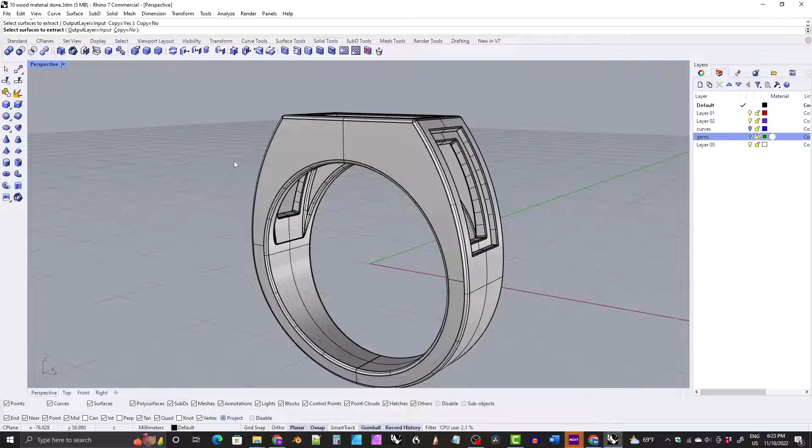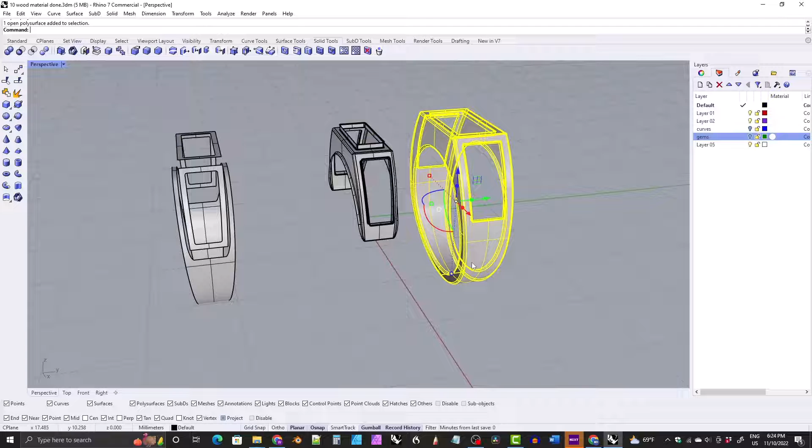So what we want to do is extract this surface and these surfaces here. Okay, so click on them and hit enter. And now what that's done is separated those surfaces out from the model, leaving us with an outside piece and an inside piece. The only thing is we want the outside to be joined with these pieces here. So let's do that over. I'm going to Control Z back to undo all of that. We'll do it over again, and this time I'll show you how to end up with everything correct.

Okay, so extract surface. Make sure copy is set to no. Click on the inside of the ring, and then click on these three surfaces here. Hit enter, and then while they're selected, hold down Shift and click on the outside of the ring and click on Join. All right, and now you should have the outer part of your ring and the inner part of your ring.

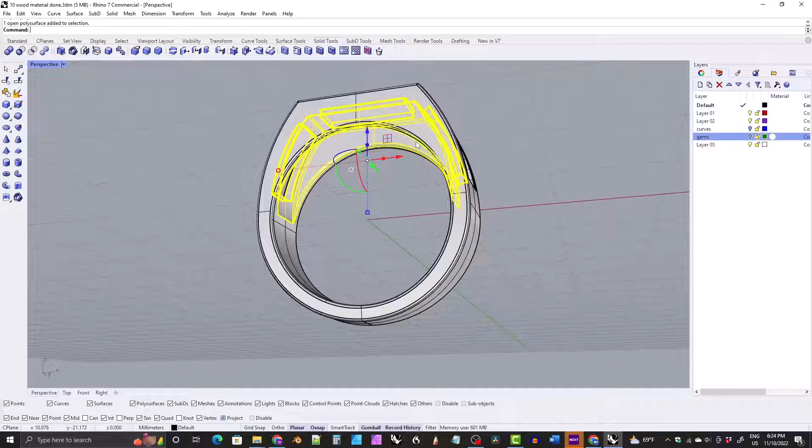I'll Control Z just to put the ring back into place, and we still have them as two separate pieces. You could put them on different layers if you wanted. That might be easier for you to keep up with. So for instance, we could put this on, say, the white layer here. I'm not saying you need to put it on the white layer, but I'm just saying you could if you wanted to. Okay, so I'll put it back. Well, I'll leave it there. That's fine.

But what we want to do now is assign a different material to this inner piece here. So let's switch back over to rendered mode and go back to our materials tab. I'm going to click on these two little arrows here just to shrink all of the properties there, and we'll right click on silver and click on duplicate. Okay, and we'll rename this flat silver. So I'm actually going to make two more materials, flat silver and rough silver. All right, right now flat silver is exactly the same as regular silver.

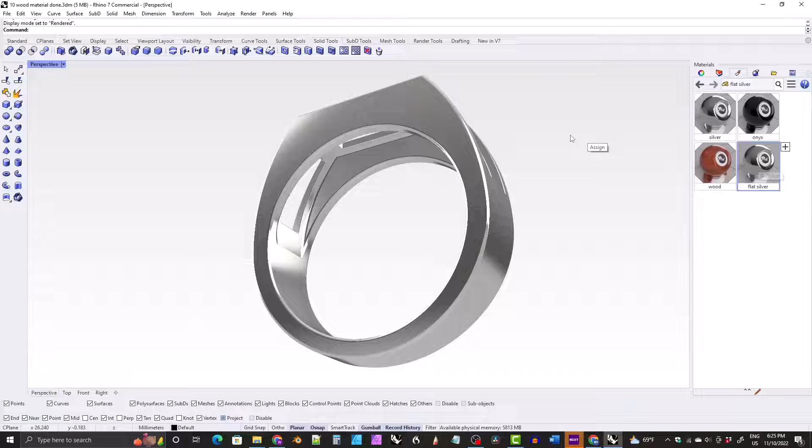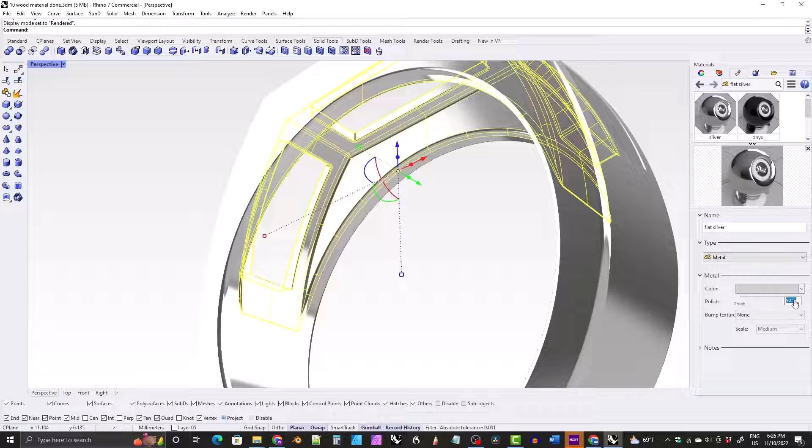We can just drag this over onto our inside piece here, and nothing has happened. We need to make some adjustments. So double click on flat silver, and we're going to adjust the polish level. So I'm just going to zoom in here so you can see how nice and shiny that inside piece is, because right now it's 90% polished. We want to double click on that and just drop that down to 60%. Okay, and you can see right away that it has turned flat in there.

Okay, so honestly we could have left it polished. As far as giving this to a client, I probably would have made a render like this. From this angle here, I would have done a side view, a looking down view, a through the finger view, and a 3/4 view. I usually would render all of those with transparent backgrounds, bring them into some other software like a vector software. I use Affinity Designer and Affinity Photo for the rest of that process.

I'm not going to go into that process today, but I'm just going to say that in the final render that I would give to the client, I probably would have left this just as polished silver. I probably wouldn't be going into all of this, but sometimes I would. If it just looked odd to me, I would sometimes change this to a flat material. So that's going to be your call, honestly, if you're ever in a position where you're going to be presenting clients with renders of the designs that you've made.

And then the second step is really going all out: we're going to add a roughness so that it looks like we never did anything inside this ring. So let's go back to our materials tab, and we will right click on flat silver and click on duplicate, and we'll call this rough silver, and we'll drag that over onto the inside there. You don't have to duplicate them every time. You could have just duplicated it once and kept working in that same material. That's up to you.

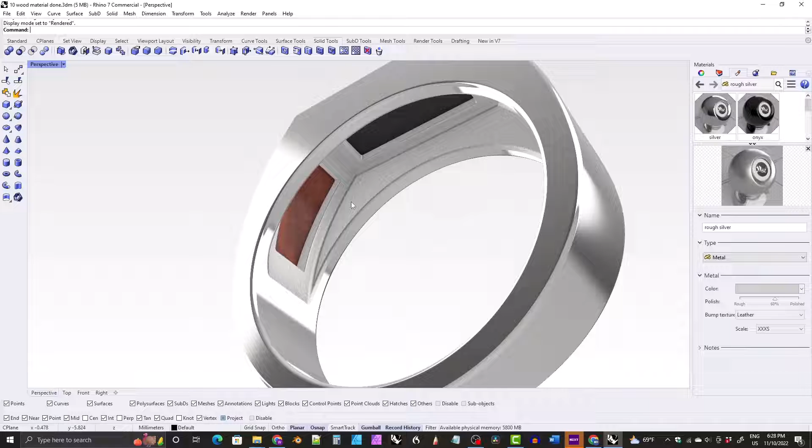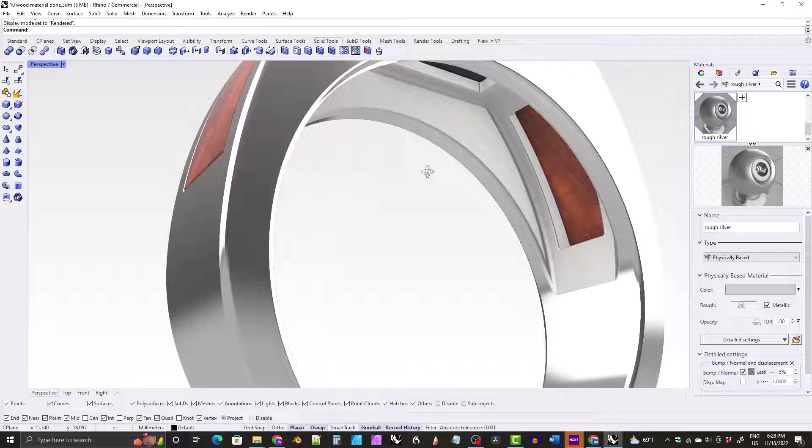And if that still looks a little too intense to you, like maybe too bumpy, like the bumps are too deep, you can switch over to physically based and then change this value right here to 5%, and you can see that just kind of softens it down. I kind of like that. So to me, that just looks like unfinished metal pretty well. I think that's pretty nice looking. All right, so there you go.

Yeah, so we have modeled the ring, we've modeled the gemstones, we've done all of the materials, including even the rough material on the inside.